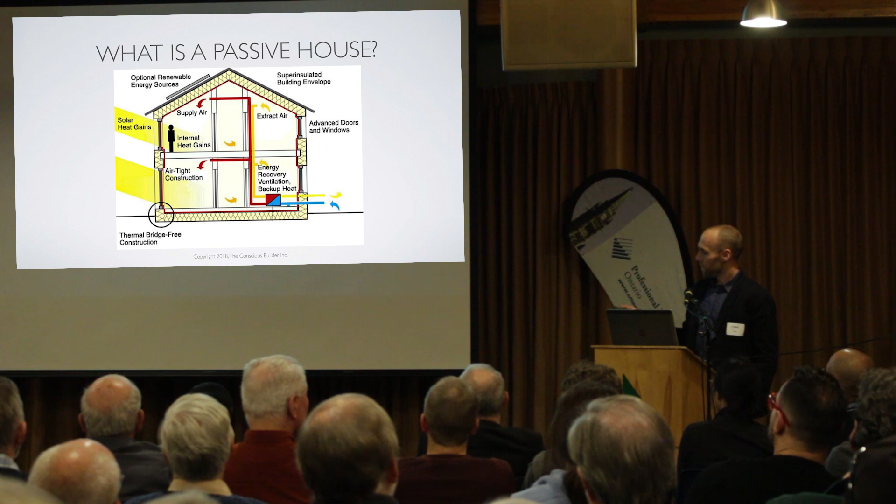So if you can orient your house properly, you can gain from the solar, you have all of your living spaces on the sun side, you want to make it as airtight as possible. You have super insulated walls, high performing windows, and then you mechanically ventilate your whole house. So when you make it really airtight, you need to make sure that you're bringing fresh air into that system. So that's basically how, in theory, a passive house would work. I'll get into what worked and what didn't work when we built our house. But these are the 5 most important factors.

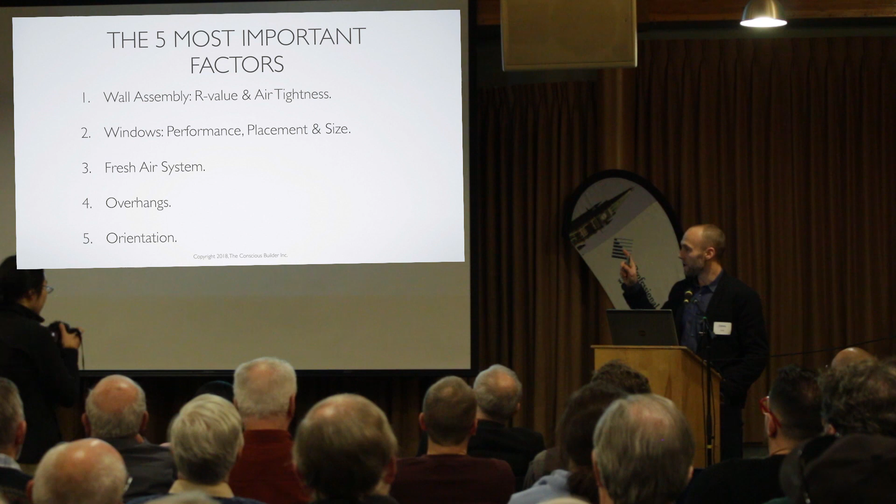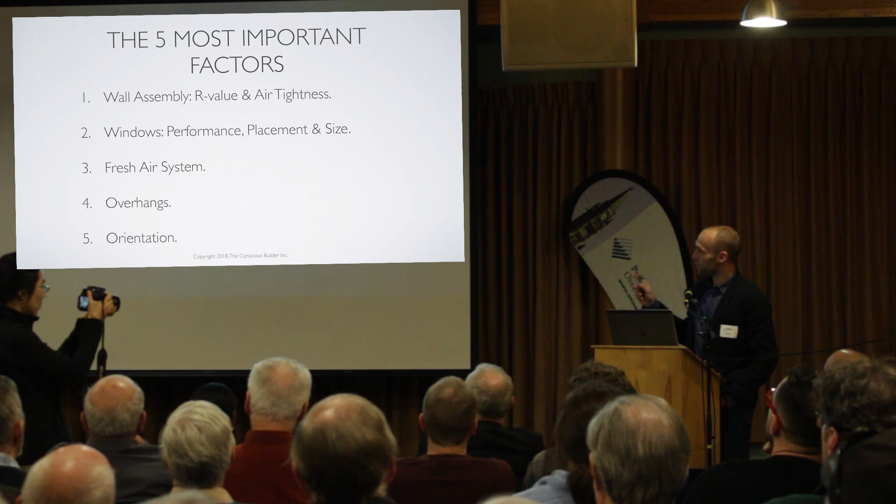So I've reordered this since I've done presentations over the last few years, because I think it's most important, when you're designing, building a house, to think of these things in this order. So if you can start with the envelope being your walls, your roof, your windows, doors, that sort of stuff. So your wall assembly is going to be your R value and your air tightness. Your windows is going to be how well they perform, where you place them in the house. Are they on the north side, the south side, east, west, that sort of thing, right?

Because you can only block the sun on the south side, and you can't really block it on the east and west unless you're getting into shades that are moving and so forth. And then you never have to worry about sun on the north side. Fresh air system becomes extremely important when you build a house. And the overhangs if you can, and orientation if you can.

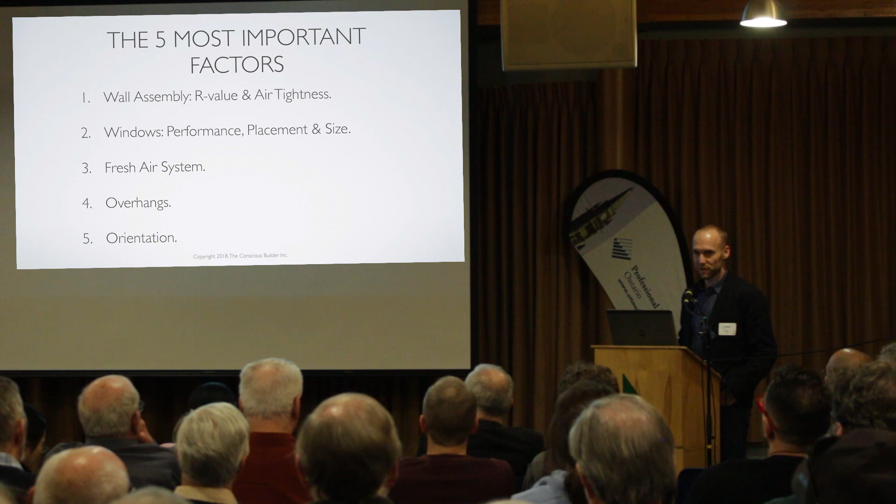And I'll get into some of those areas, because once again, if we can all do it perfectly, I'll explain what I think, but everybody wants something different. You want to make it look good, just like electric cars. If it doesn't look good, people aren't going to buy it.

So we've done now 5 passive houses around the city for different architects. And the first one that I had done was for ourselves. So we tested it on our own house. And we wanted to do something that wasn't reinventing the wheel. So we weren't reframing a whole house in a completely different way.

One of the concepts behind building a super insulated wall is you have to really understand building science. And a lot of the people that you'll talk to say to put the load-bearing portions towards the inside, which makes sense, because if you ever have any moisture issues, you won't really know if it's on the outside, and the possibility of it happening is going to be higher on the outside.

I decided to put it on the outside because of the constructability, and we actually started building this house in November. And I remember when we built this house, we were building an R2000 home at the same time.

We basically got the foundation in, put the insulation down on the slab, and it snowed and it never stopped. So we wanted to get it closed in as quickly as possible, and that's just a reality of building in our climate, right? If everything was perfect, we'd be starting construction in the spring, and all of our houses would be closed up by the time it snowed, and we'd be doing all the interior work, and it'd be perfect, right? But unfortunately, it doesn't work like that in construction, or anything really, but that's besides the point.

So here's what our wall assembly ended up being like. I ended up with about R73.5. So to give you an idea of what that is, if you were to buy an older home, for example, like 2x4 construction, if it has insulation, you might have R12 in there. Houses nowadays, minimum building code, there's different building packages, but typically the building code now is R24. And they're requiring you to either go with an R24 batt, which is more expensive, or usually you do an R22 batt and you put 1 inch of exterior insulation and you get rid of the thermal bridges. So things are changing.

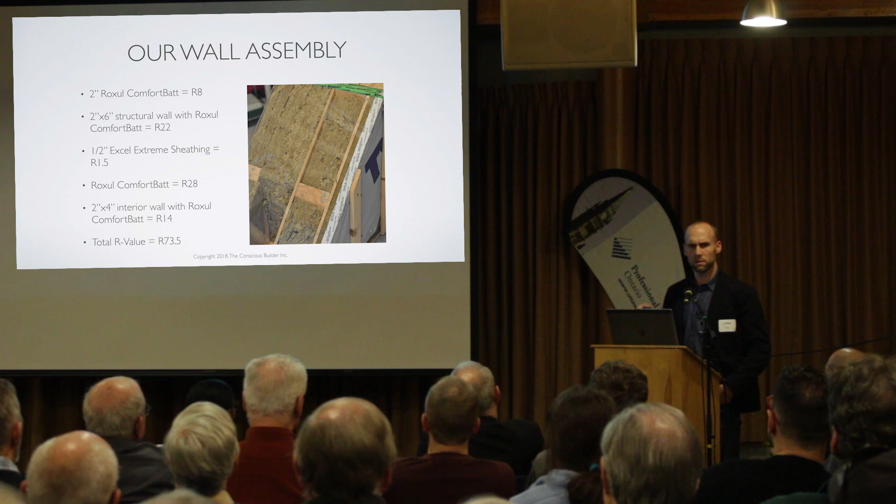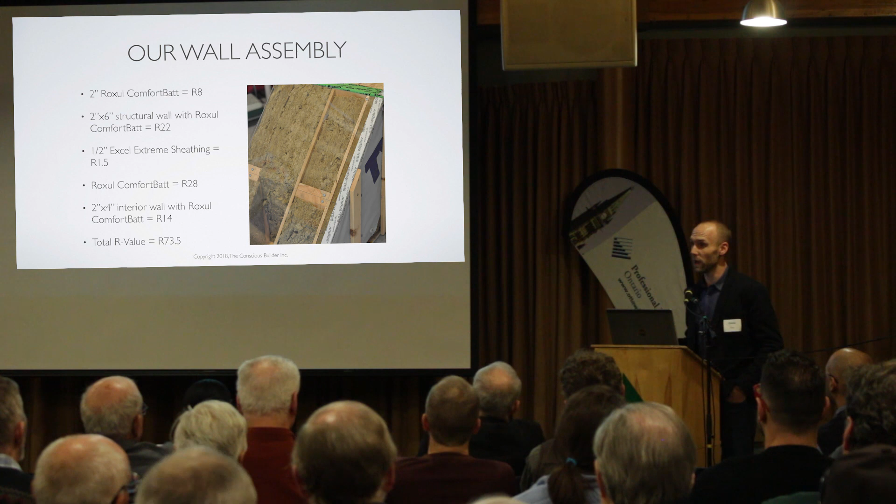We also went with Roxul in this case, which is now rebranded to Rockwool, I believe. Because there's no fire retardants, it's rock. It's naturally going to prevent any fires, not catch on fire because of the rock. If it gets wet, it doesn't lose its R value. It can dry and it's totally fine. If fiberglass gets wet, for example, it's garbage. You might as well throw it out. Mold's going to grow on it, lose its R value. So we wanted to prevent problems when moisture gets in there, because it probably will at some point. A mouse chews a hole through something. Who knows what's going to happen? So we went with Roxul.

Where's your vapor barrier? So I'm actually going to talk about the difference between an air barrier and a vapor barrier as well. In this case, our vapor barrier ended up being on the inside, but our air barrier is taken care of here with this 1/2 inch Excel Extreme sheathing, which is a fiberboard. And then we have our weather barrier here on the outside. So instead of doing our air barrier and our vapor barrier on the poly, which you typically see in construction now, and then that gets taped, we separated them. So it's on the inside? It's on the inside, yes.

So this would be after we frame the exterior 2x6 wall, so this wall here, and after we sheathed the underside of the trusses. And we sheathed it and we taped all the joints because we wanted to build a chase below that, because we had to run ductwork for all of our ventilation system, and we had to run electrical and pot lights and all sorts of things.

And we wanted to make sure that we weren't penetrating our air barrier. So our air barrier on the roof side is actually the OSB, which is also our vapor barrier. So if you go with 5/8, actually 1/2 inch OSB or 7/16 OSB can be vapor barrier as well. And then we taped all the joints.

This is the Excel extreme sheathing you see here, which is typically used on the exterior of buildings. We used it here because it's permeable. And then we taped everything from there. What was the overall thickness of the wall? If you count the masonry, we're about 2 feet. Without the masonry, about 19.5 inches. Which ends up with really nice window wells on the inside if you keep your windows towards the outside, which is part of it.

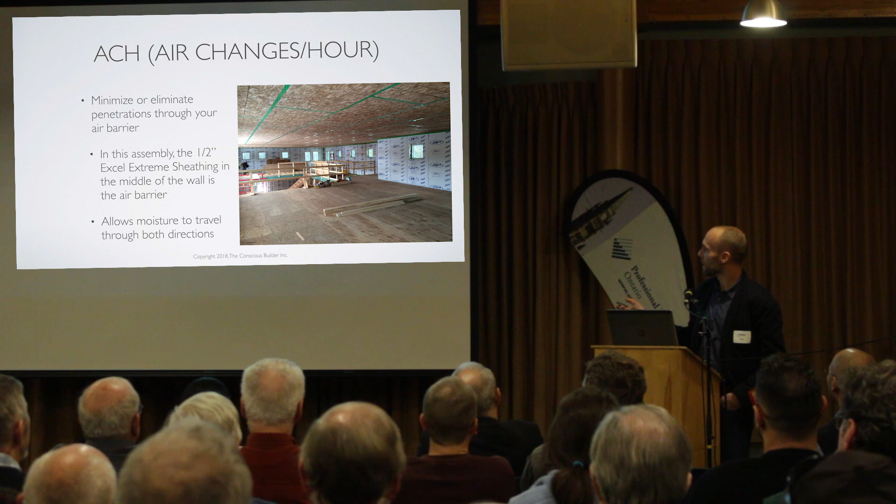So here's the difference between air barrier and vapor barrier. This is really important when you get into building science, if people don't understand the difference between a vapor barrier and an air barrier, there could be some issues there. So the building code actually requires your air barrier to be continuous, which in theory it isn't, and it's never been done ever, because if it was, you'd have an ACH of 0. And to my knowledge, nobody has ever done that anywhere in the world. So the air barrier needs to be as tight as possible, but if you take care of that air barrier somewhere else in your wall assembly, your vapor barrier does not need to be continuous.

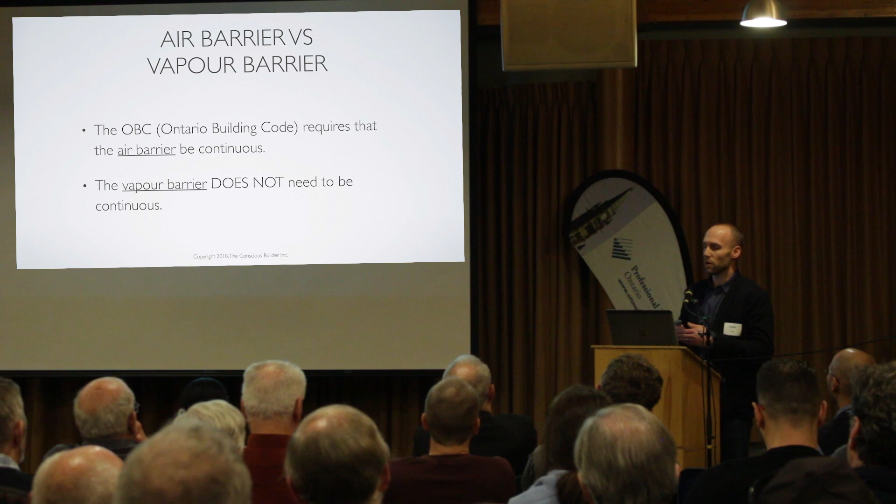One of the things that we obviously knew about going into it, these back windows, you can't tell here, I'll show you on another picture, but they're above a walkout basement. There's a 23'4" opening, and we had to carry masonry across that opening. And the reason we had to do masonry is because the area that we built the house in had a covenant for brick, stone, or stucco on the exterior, and I am not a fan of stucco, so we went with brick.

So we had to do big steel beams and lintels and all sorts of other complicated things. And we actually ended up having frost on the outside of our windows at one point, and that was new to me, and I'm like, oh, what's going on? Call my window guy, and he's like, don't worry, that's actually a good sign. That means that your windows are performing, right? Because we don't have the heat loss. So frost can build up on the outside of your window. That means you don't have that heat loss coming from the inside, just like frost builds up on your car or anything else that's outside. So we actually had that happen quite a few times.

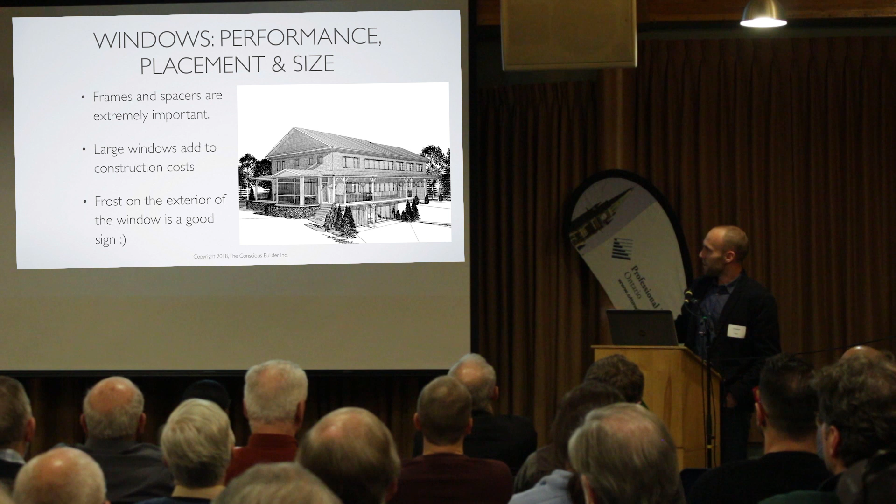So E actually stands for enthalpy. Usually people call them energy, but people don't know what enthalpy means, so they started calling them energy. But these are actually ERVs, and they allow the transfer of humidity through the core. An HRV has an aluminum core, and I'm actually not sure what the material is in these cores, but it'll actually allow vapor to travel through. And these can run 24/7, whereas HRVs technically shouldn't be run in the summer because that hot, humid air from outside is being pulled into your house. Now, in theory, you don't really want to run that in the winter either, because then you have that dry air coming into your house if you need moisture in your house.

So actually, a good ERV, which all the typical manufacturers are doing, Venmar, Lifebreath, they're all doing good ERVs now that don't freeze in our climate. The issue with ERVs at the beginning is that the cores were freezing, and our cores actually froze at the beginning. They weren't supposed to, and that's why they weren't working for our climate. So I won't get into all the different manufacturers, but I definitely recommend ERVs and run them 24/7.

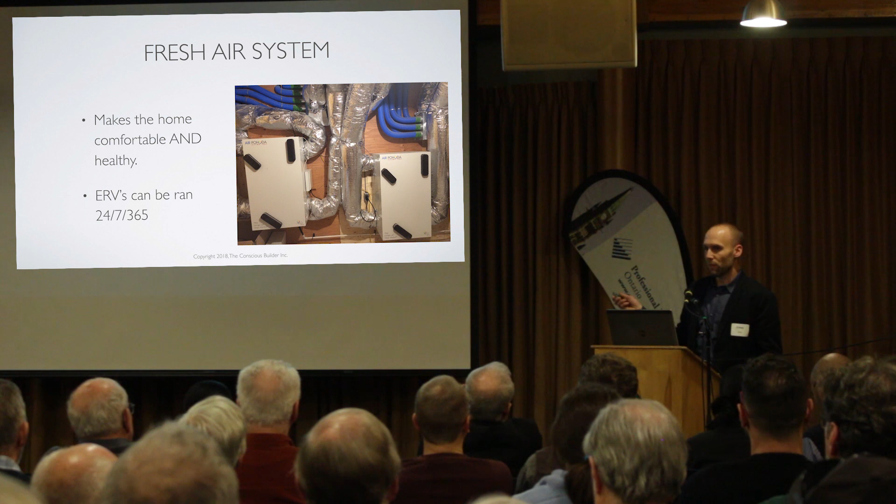This kind of gives you an idea of, I had said that we were doing a chase below our roof trusses. This is all the ductwork that we had. So our whole house, to give you an idea, our house, as I say was, because we actually sold the house last April. So our house was 4,000 square feet with a big great room, 17-foot ceilings in the middle of the house. The whole house only needed 18,000 BTUs, in theory, to heat. A typical house that size would need about 90, I believe, built to minimum building code. So we heated the whole house with air source heat pumps. We were fossil fuel free as well. We got on the microFIT. We had solar panels on the roof. I'll show you some numbers for that.

But one of the things we did to keep the house airtight is that we eliminated all of our fans. So no bathroom fans, no range hoods, and our dryer didn't vent outside. So no range hood, people have done that, not a big deal. You put in a charcoal filter; if you do a lot of greasy cooking, maybe you don't want to do that. Convincing people not to put bathroom fans in, that's usually where I get some pushback.

However, all of the bathrooms have exhaust ducts, and they all have booster switches. So the idea is, when you turn a fan on, for example, say you weren't running it through your ventilation system. If you turn your kitchen range hood on or your bathroom fan, that's sucking air out of your house. And that air has to come into your house somewhere. And that's going to come in just through leaks and holes and anywhere that it can in your house. So by eliminating those, you actually precondition the air that comes into your house.

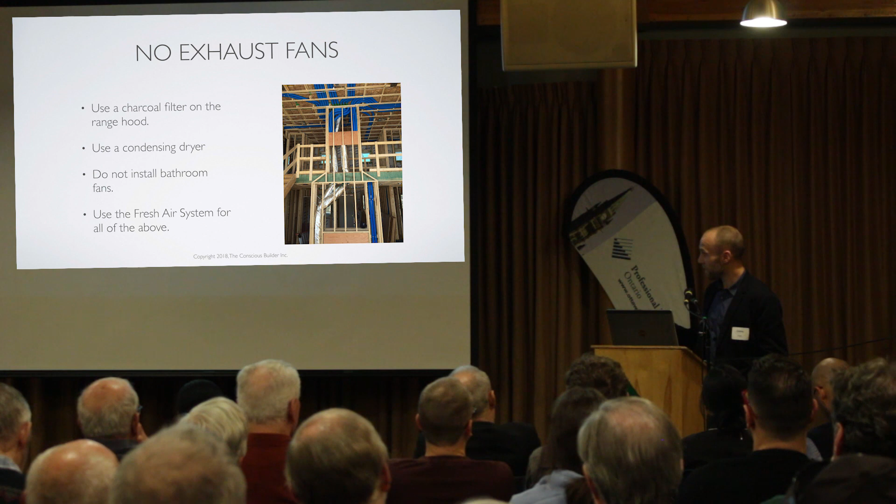So to give you an idea, I won't go through all the math on this, but I can obviously share this with everybody. I think you get a copy of it on the website. But to give you an idea, people love when we redo kitchens, they love the big kitchen range hoods. If you put a 1,000 CFM fan in and you run that, based on being minus 25 degrees outside and 22 inside, you can lose almost 90,000 BTUs by running that fan.

So that's energy that you have to then use to reheat your house. However you're heating your house, that's just adding more energy, whether you want to call it money or adding to the energy grid. It's definitely not a good thing.

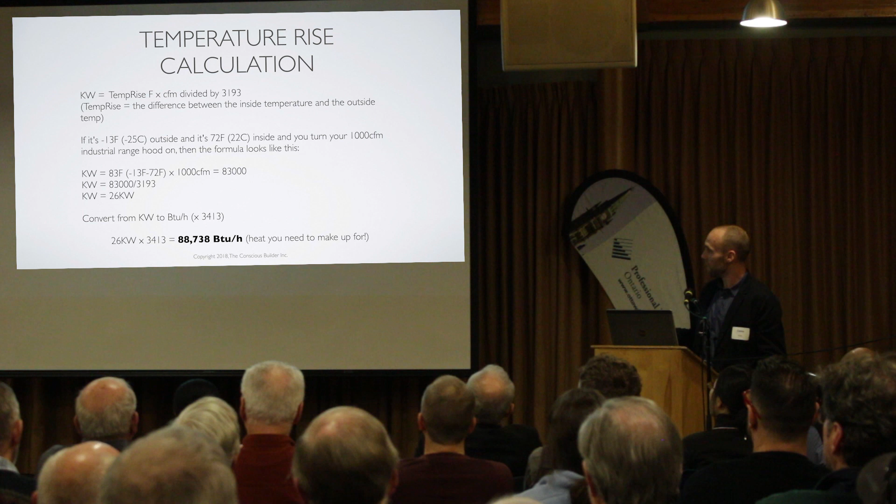So the next thing would be overhangs. If you can do overhangs, you can design it. Great. The issue is trying to get rid of thermal bridges is important. And when you're adding exterior insulation, I mentioned we put 2 inches of insulation on the outside. You have to attach structural members to that somehow. So you end up with details like this, where you have like a 2x6 and you attach a roof to it.

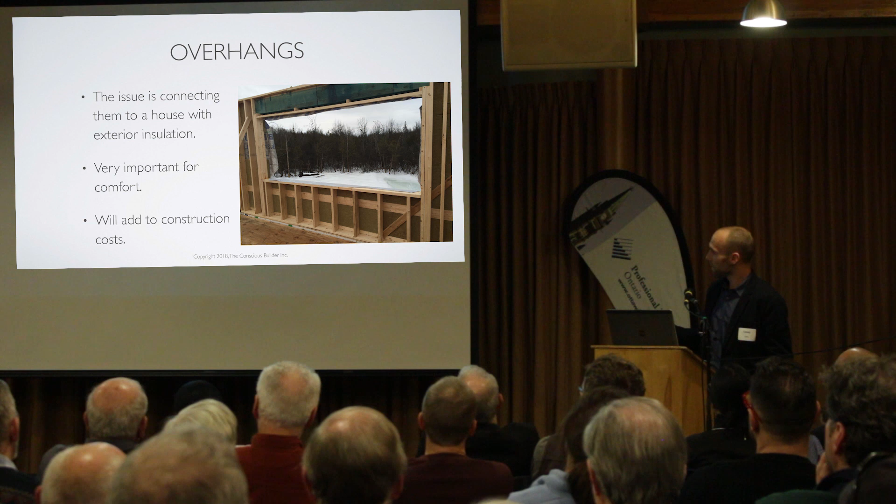These are all the little details that you need to have everybody working together, which makes it a lot more difficult to do details like this when you're building houses by the hundreds every year. Easy to do on a smaller scale, harder to do on a bigger scale. Obviously, if you can get good orientation, great. I'll explain why I put this in this order later. We were lucky enough, we bought our lot knowing that we could face the house directly south. So we angled it to get that full southern exposure.

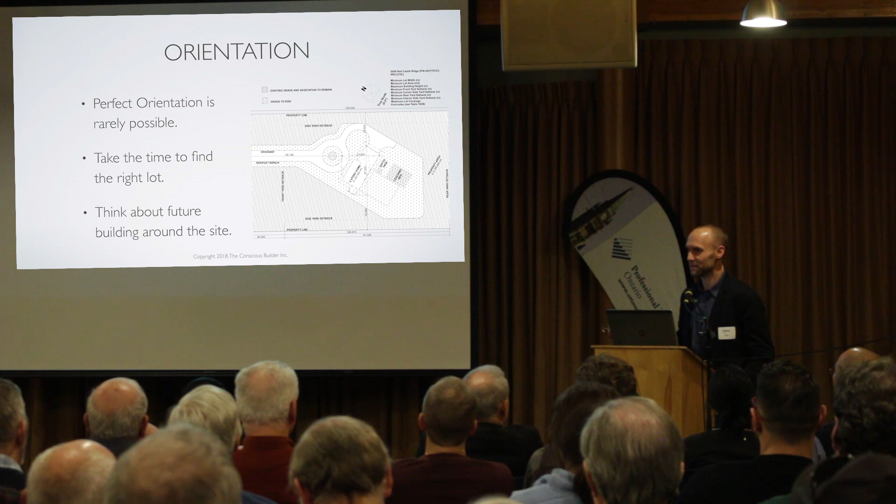And one of the things that I didn't tell you, I actually had 6 feet of peat moss on this lot, so I basically blew my budget before I even had a foundation. But that's beside the point. It did work out really well in the end. But yeah, we had so much peat moss on our lot that we actually had a backhoe get stuck. We had to get a bigger backhoe to come and pull the smaller one out of the mud. But I don't think my excavator lived that one down for a while.

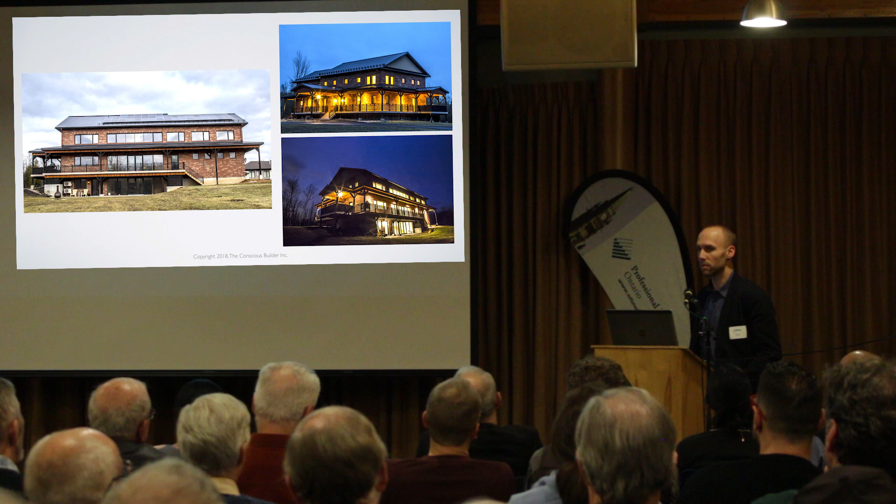And then this is another example. I'm running out of time, so I won't go through everything, but this gives you a good idea of how we built it. Once again, you can kind of see that it's exactly like the first picture that I showed you. This would be the south side here, all of the windows, and then smaller windows on the north side. And then we basically had almost no windows on the east and west side because you can't block the sun on those sides at all.

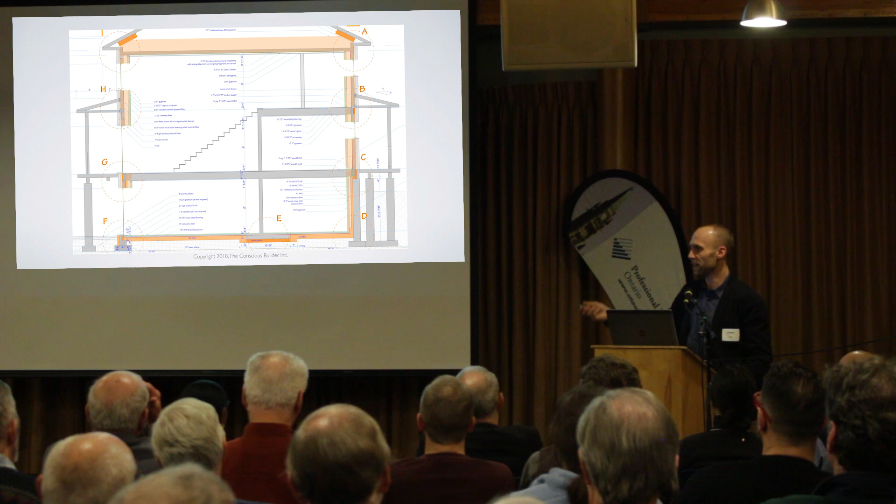I won't get into it, but we did do a version of Swedish platform framing. So typical construction is you have your foundation, you sit your floor on your foundation, you sit your wall on top of that floor, your next floor sits on top of that. The issue is that becomes an issue with the air barrier. So this red line that you see going all the way around is our air barrier. And the trick is, how do you make that continuous? We ended up hanging our floor joists after the fact. So once again, another detail that we can do, but training somebody else can be difficult.

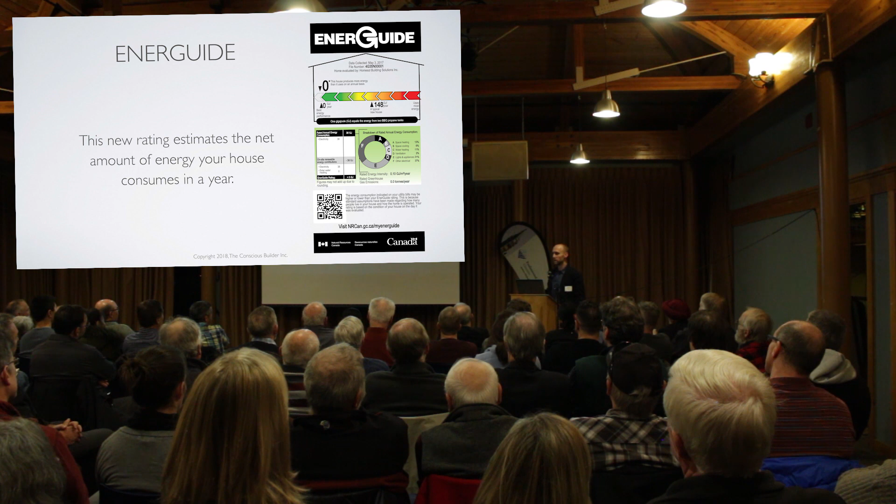So this is where we get into a little bit of theory. This is the new EnerGuide rating system. Has anybody seen the new one? You might have seen the old one, which is a scale from 0 to 100, and you have no idea what the number means because it really doesn't mean anything. But anyways, the new system that's now out is the lower the number, the better. So this was actually my house. It's supposed to be 0. So in theory, I was living in a net zero home. In reality, I was not.

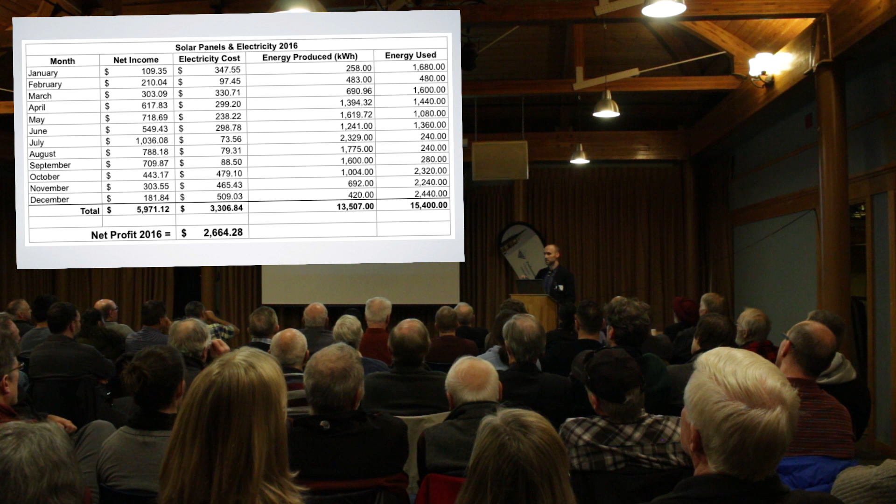And it was a big house, but there were only 3 of us. We had Airbnb, had the office. We'd do some work there. And the house was never really fully done, so we were always working on the house. So there's tools running. But this is before I got the electric car. So don't worry about the dollar. I was making money just because I was part of the microFIT. But we were almost net zero. And we didn't have any natural gas, so that's hot water, air conditioning, heating, that's everything. So it was pretty close.

Now, we weren't net zero. If you were to do it month by month, in the winter months, we were not net zero. In the summer months, we were producing way more, right? But we were on the grid because we were selling it back through microFIT. Now, when we added an electric car to the mix, we were basically double. So our costs didn't really go up that much, but we were using a lot more electricity. So that's one of those things where theory versus reality is important to know, right, in testing these things.

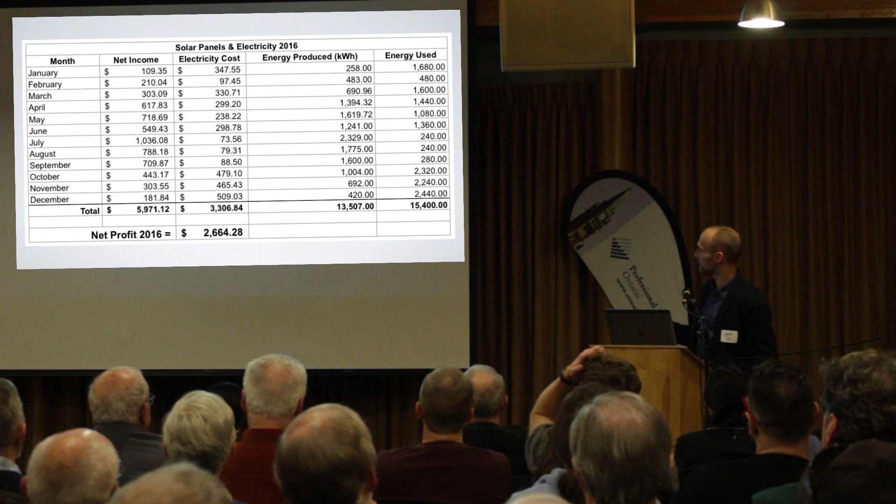Because as soon as you throw humans into the mix, it throws everything off. Because you can't predict any of us, right? Or how we live, and everybody's different. And there's been studies done where they try to model the same house, but then one house ends up being the laundromat for the whole neighborhood, and that throws everything off, right? So there's all sorts of things.

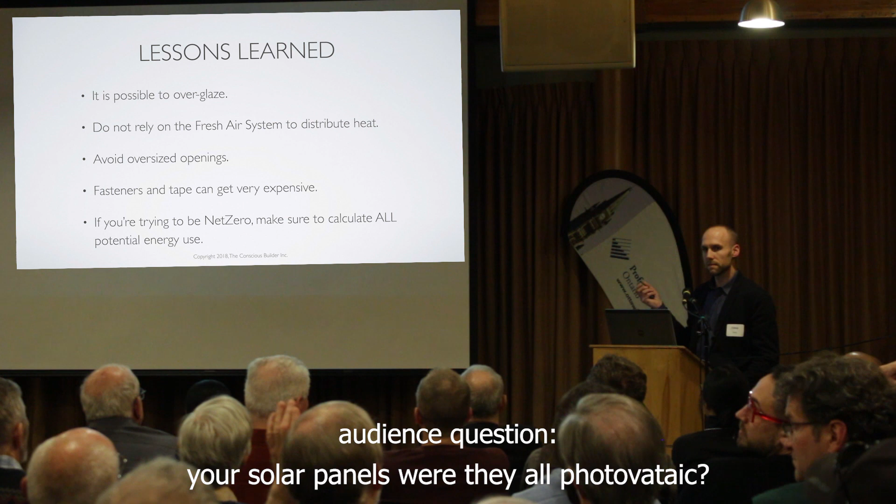Question. Yeah. Your solar panels, were they all photovoltaic, or did you have thermal panels as well to produce hot water? No, they're all PV. And then we had an air source heat pump hot water tank.

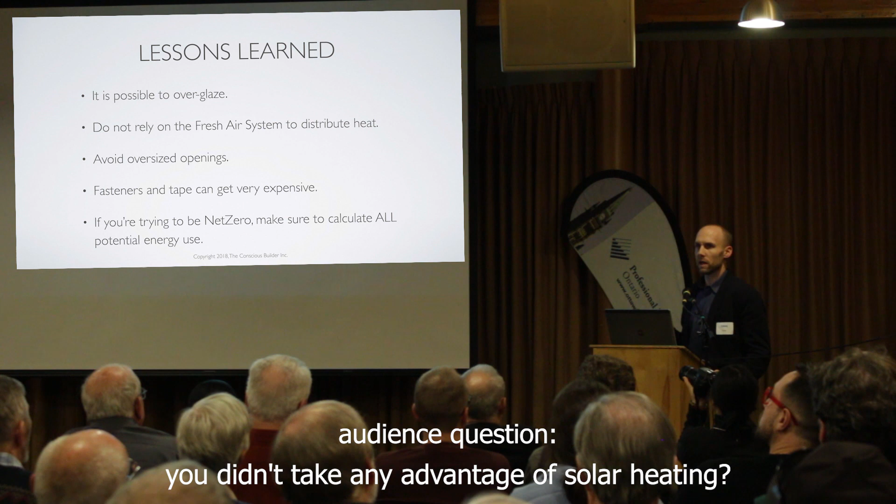You didn't take any advantage of solar heating? No, I talked to my plumber about that, and one of the things is I didn't want to turn it into a science project and scare people away, knowing that I would probably be selling it. So I wanted to use technology that was readily available and easy for people to fix. And the solar hot water didn't really make sense cost-wise for me, with the solar panels producing the energy and using the air source heat pump hot water tank.

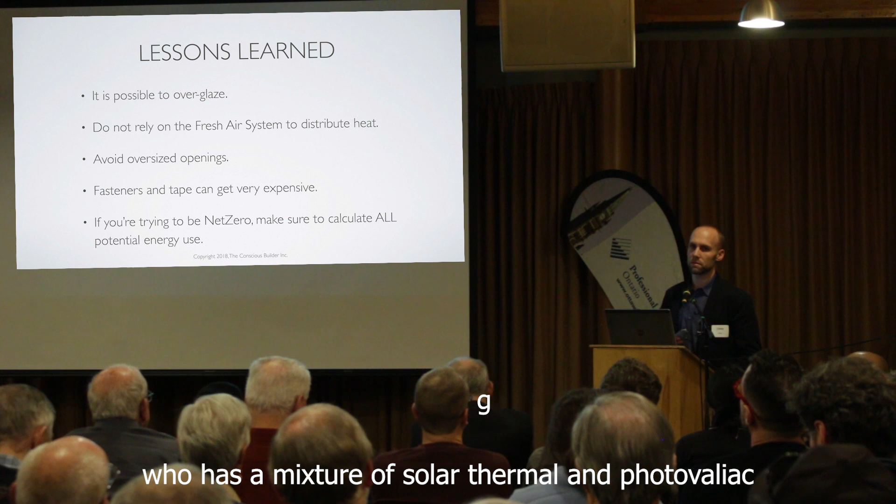That goes counter to experience that I have with my brother, who does a mixture of solar thermal and solar photovoltaic. He gets a lot of heat from his solar panels. That he heats his house with or heats his water with? He heats his underfloor heating with. Oh, low-grade heat. Yeah, we didn't have radiant. So we were heating with air source heat pumps. So the only thing we would have been doing is heating our hot water tank with it.

Did you think of making the building LEED certified? Yeah, I just didn't go through the paperwork and the cost of doing that. I don't think I'd be LEED Platinum because I'm not close to bus stops. I like LEED and it focuses on materials, but being a carpenter by trade, you know, the LEED Platinum building for the trades at Algonquin is great, but you have a wood shop that's full of glass and no parking for any of the tradespeople, right? So there are some things that just didn't make sense. I'd probably be LEED Gold or something, but I didn't actually talk to Stefan about doing that.

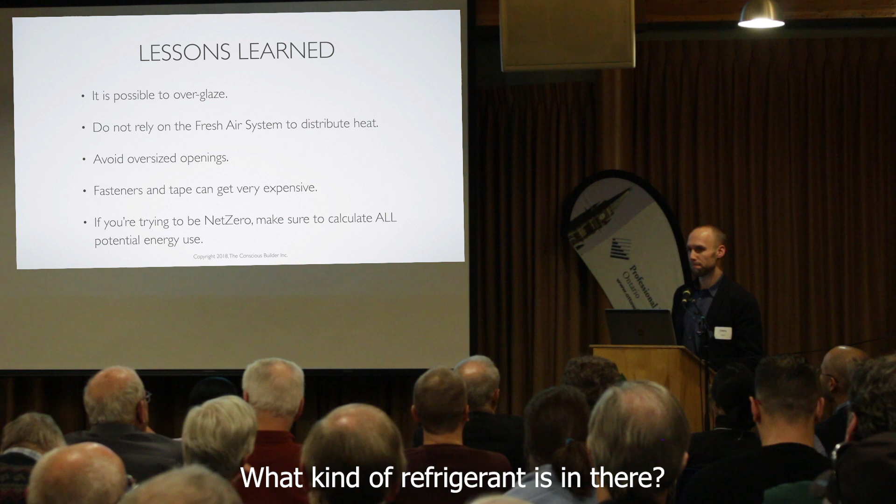You said you're using air source heat pumps in the winter? Yes. Mitsubishi's units now are efficient to minus 27. How efficient? I'm not sure what the percentage is. Down to a couple, less than one or more than one? I'm not sure. If Stefan was here, I'd be asking him for that. What kind of refrigerant is in there that works at that level? I'm not sure what they're using. I don't know the specs on the refrigerants or anything. So ours were working to minus 25 at the time. The new ones say minus 27.

So the thing is, when it's really cold, it's typically sunny out. So we would get all the heat from the sun because of all our south-facing windows. Now, one of the big lessons I learned in having all those windows is that I couldn't regulate temperature. So it is possible to overglaze. I had all this heat coming from the sun, but it was minus 25 outside and it was like 28 degrees inside and I was boiling. And I couldn't sleep at night.

In theory, yes, I'm producing a lot of heat and it's great, but it's not comfortable, right? The only reason we do anything as humans is for a feeling, ultimately, right? And if we're not comfortable in our house, what's the point? So one of the things I've realized is that it is possible to overglaze. And yes, it's great if you can get that heat from the sun, but understand that you can't turn the sun off, right?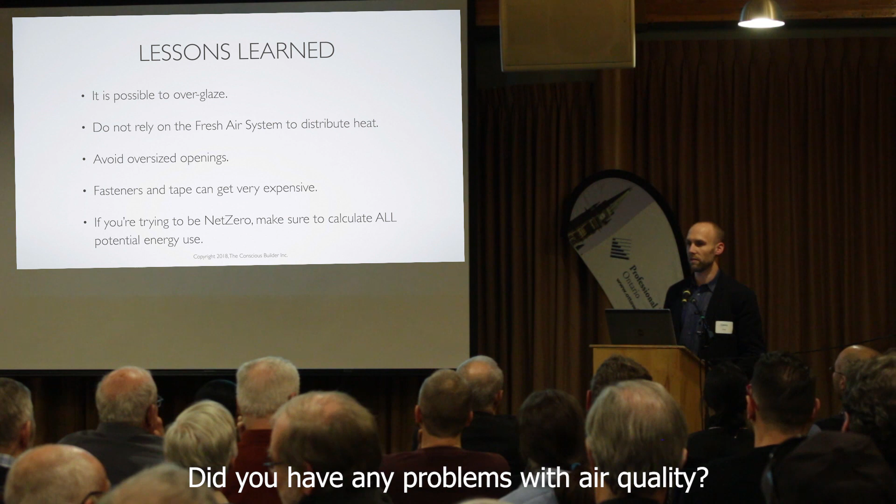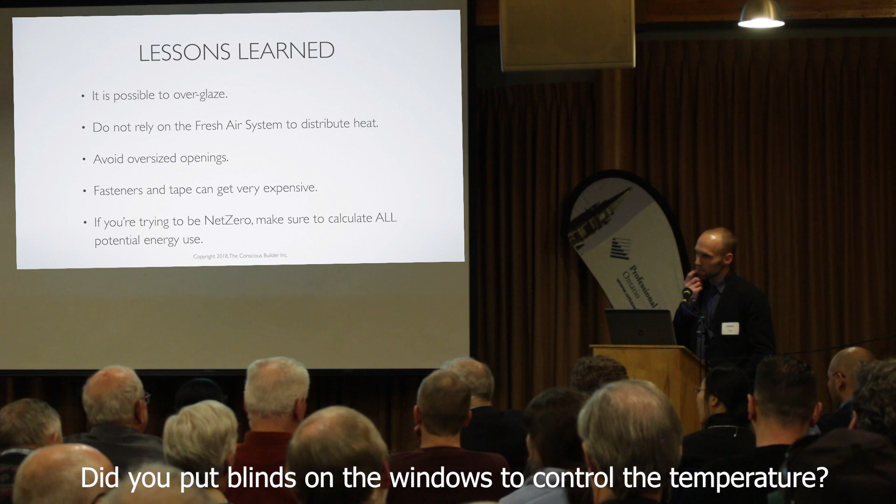Your building is so airtight. Did you have any problem with air quality? No, because I have two ERVs in that house that run 24/7. Did you put blinds on the windows to control the temperature? We could. We didn't because we didn't have any rear neighbors. So that is one thing.

But ultimately, what you'd want to do is have blinds on the outside, because if you have them on the inside, it's already in your house. So once again, it's kind of counterintuitive. There are windows out there now that actually have a 4th pane of glass that have blinds built into them, and you can get all sorts of solar sensors. But it's adding cost, right? So at what cost and where does it make sense?

Because I got pricing for windows for that house. This was 6 years ago. My quotes ranged from $70,000 to $120,000 just for windows. So that's a non-starter for most people, right? There's an old-fashioned technique, it's called shutters. Yeah. But everybody likes simple, right? Nobody wants to have to close the shutter.

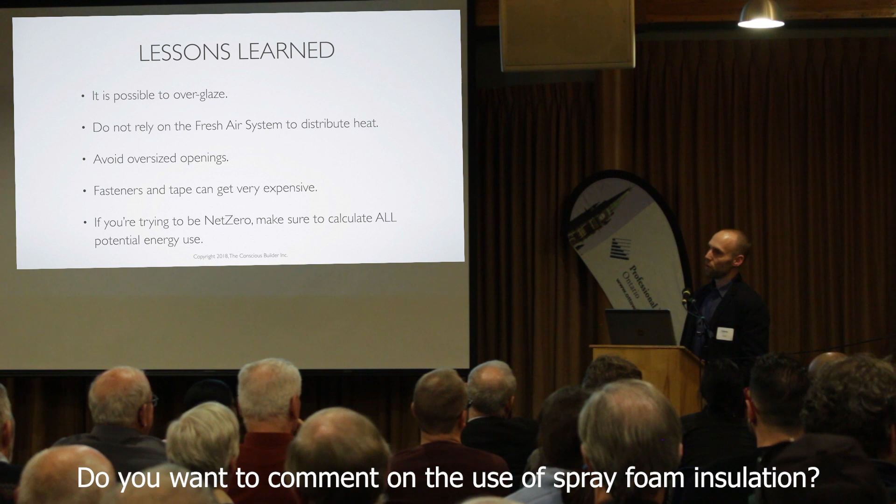Do you want to comment on the use of spray foam insulation? Yeah, we avoid it whenever we can. Where we use it is in renovations. So if we can design to avoid spray foam, that's what we'll do, for multiple reasons. One of the biggest reasons is that's the most expensive way to insulate, and it has its places, and we think that's really in renovations. If we can design a house to avoid spray foam and actually do a better detail, like what we did by hanging our floor joists, that's what we would recommend. If you have a 100-year-old house and we're trying to make it better, spray foam makes sense.

So on that note, the 4,000 square feet though, that includes the basement. So it was actually a 2,800 square foot home with a 1,200 square foot basement. So the 4,000 square feet was absolutely everything. So it was a 4-bedroom home with way too many bathrooms.

What is the total cost? I don't know, because I ended up doing a lot of the work myself. It's not really legitimate, but I can tell you. So I get this question a lot, so I wrote a blog post about this. Building custom homes is expensive. Doesn't matter if we build it energy efficient or not, it's going to cost more. And I always get the question, well, how much extra does it cost to build a passive home or R2000 or net zero, whatever it may be? And I answer it like a politician and say, well, it really depends.